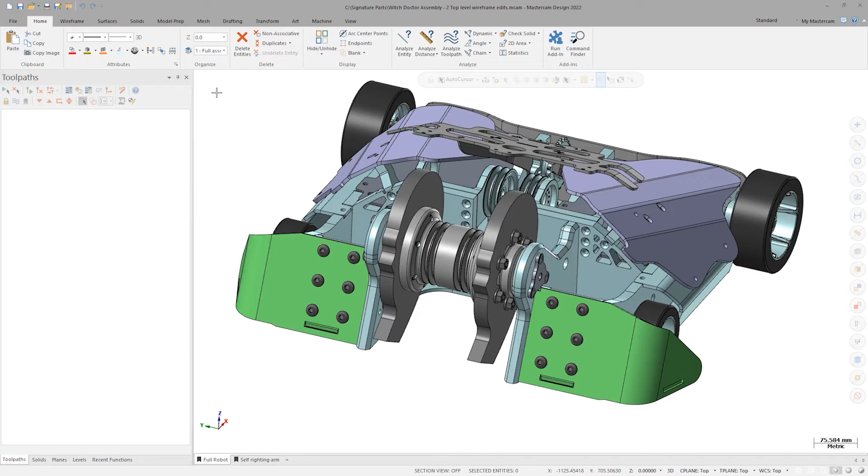This is the Mastercam design file for the Witch Doctor BattleBot that Mastercam sponsors. Many of the components for this robot are machined right here in our manufacturing lab. This includes the wheels, weapon hub, fire system, and a plethora of drivetrain components.

For this segment, let us focus on this self-righting arm. If an opponent overturns Witch Doctor, this arm is how the BattleBot can flip itself over and get back into the action. Clicking on this second view sheet, the self-righting arm is isolated. Specifically, let's look at modifying these cutouts. These serve two purposes. They are aesthetic, but also remove some material to lighten the robot so weight can be distributed in other, more critical places.

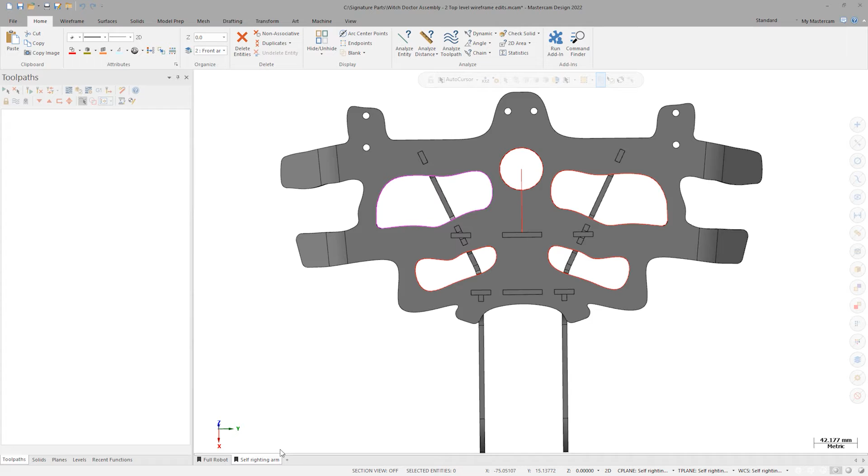So what do I mean when I referred to top-level editing? Well, to launch this functionality, simply double-click on any of the wireframe entities. This launches some visual direct editing tools specific to the type of entity that has been selected. It allows for manipulation of the wireframe directly, similarly to how model prep works with solids in Mastercam. There are tools for changing the arc sweep, start, endpoints, and radius.

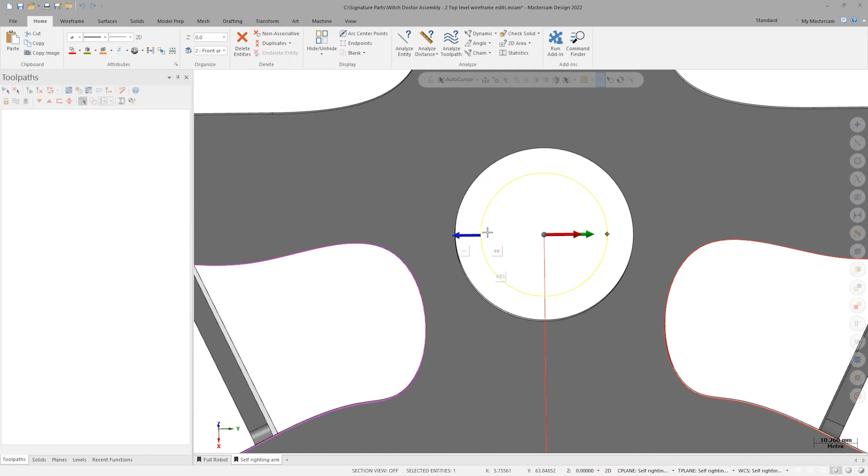This circle cutout needs to have a diameter of 30 millimeters, so I will click and drag the blue arrow to modify the radius. Alternatively, I can type in a radius value of 15 millimeters. Once satisfied with the result, press Escape, and you'll see that in the Solids Manager, the extruded cut that drives these cutouts is now dirty. Regenerating the solid updates the extrusion to reflect the change.

Next, I want to add another lightening hole centered below this existing one. These new editing tools apply to more than just circles. Double-click this line, and this time set to copy. Take the endpoint and snap it to an AutoCursor position at one of these cutouts. Move the other endpoint. Hitting Escape, this will give me a reference position to create a new circle.

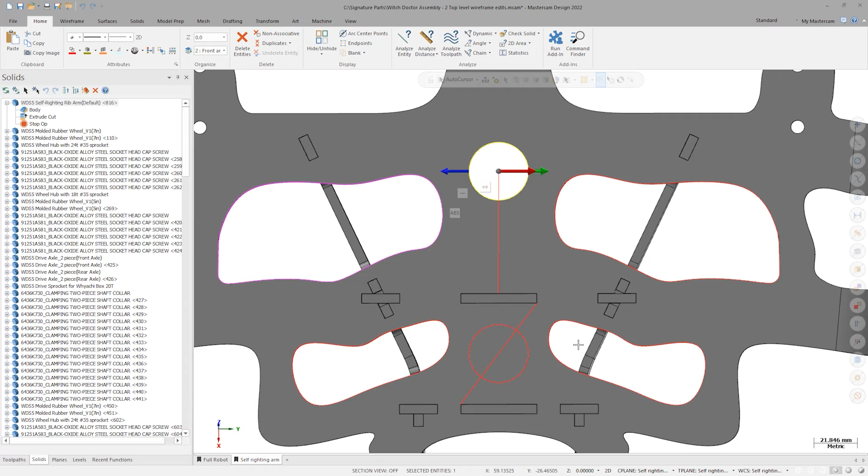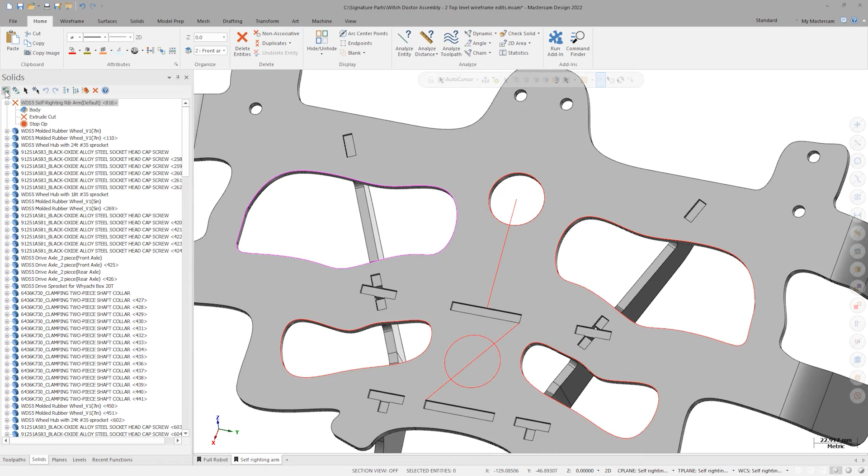Now double-click on this circle again and select Copy. I'll select the center point of the new reference line. Hitting Escape once again, I can proceed to the Solids Manager to launch the extrusion and add this new circle as a chain. Regenerate the solid.

Lastly, I wanted to point out that this direct editing also supports splines. I can double-click a spline, hover over an endpoint, and extend a spline as needed. I can even move and copy it.

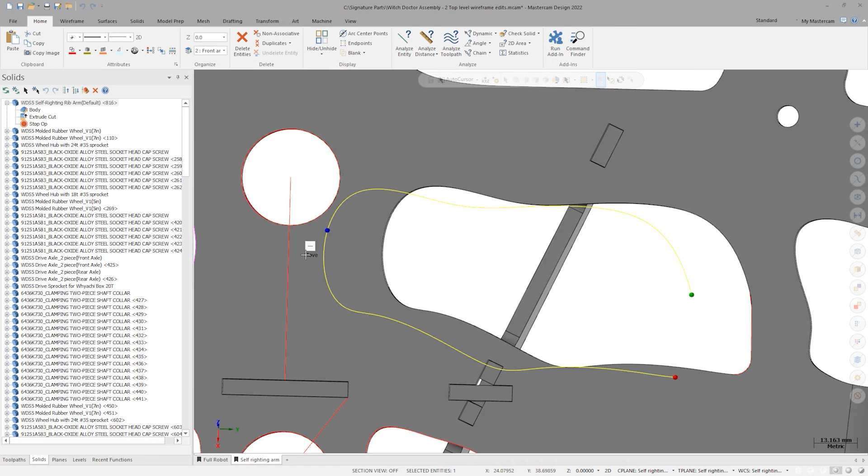Navigating back to the first view sheet and looking at the entire assembly, notice the new updated self-righting arm design. I was able to make these modifications without launching a single wireframe function inside of Mastercam. In Mastercam 2022, all this simple wireframe editing can now be done right at the top level, saving mouse miles and increasing productivity.

This is also incredibly useful for adjusting a toolpath that is driven by wireframe. Adjustments of tool axis control lines or containment boundaries can happen right in the graphics view. As you adjust to using Mastercam 2022, this is a function that will help to streamline your overall workflow for both CAD and CAM.